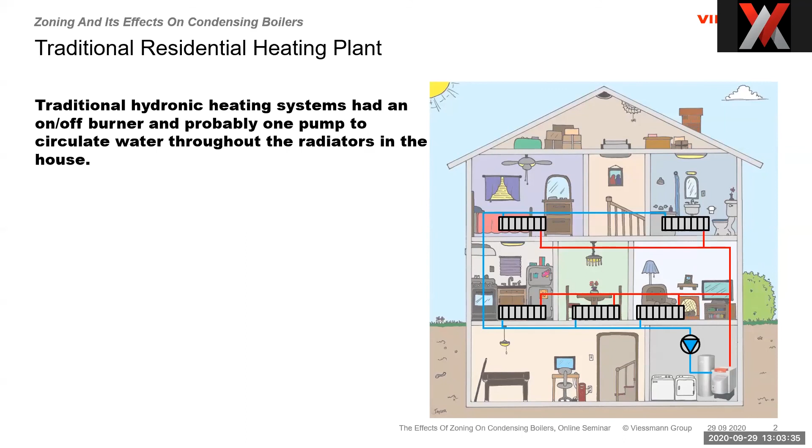Looking at boilers and how we put them in buildings, historically we had a building with a boiler, hooked up the piping, maybe one pump, and pumped water through the radiators. The boiler's control was set at the hottest temperature needed for the year. We had an aquastat on the boiler — set at 180 Fahrenheit for baseboard radiators, or 160 for cast iron — and that's what we had. We didn't really have a lot of control over what happened in the space. People in the house had to just live with it; when it was warm outside, the boiler was still making 180 degree water.

People tried shutting manual valves on the rads, and a lot of times they didn't work — you know that if you try to close a valve that hasn't been closed in 10 years or 20 years, it doesn't work very well. So this is how we started.

Even going back further, we didn't even put a pump in it. Gravity fed systems used really big pipes to reduce friction loss, letting the hot water rise to the top and the cold water fall to the bottom, and that's how we heated the building. Things have changed over the years — the first thing we did was add a thermostat, which was the device that allowed us to control when the boiler turned on and off from the space.

But it didn't control anything except the room it was in. The thermostat was located somewhere in the central part of the home where it was comfortable, where most people hung out. And when the thermostat was satisfied, it turned the boiler off, and the house cooled down.

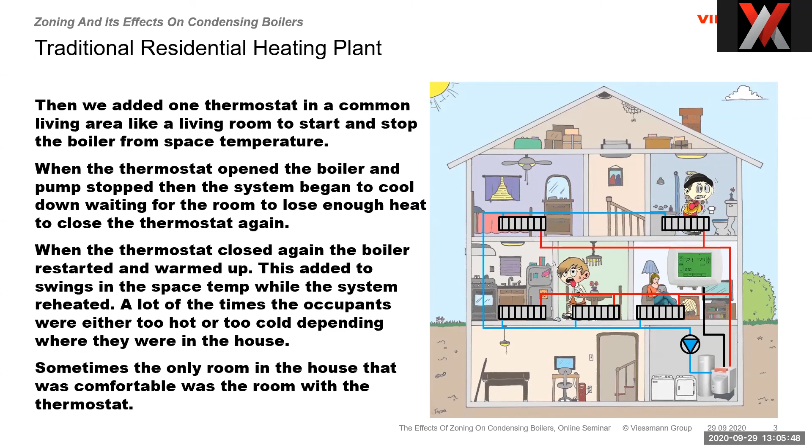So the only room in the house that was often comfortable was the room where the thermostat was in. Now fortunately, during these periods—and I grew up in some of those periods—everybody congregated in the living room anyways. We all sat around the same TV and watched the same shows, and there wasn't a whole lot else to do.

We added outdoor reset to try and make things more comfortable, and the second benefit of that is it also made it more efficient. The outdoor reset looked at the outdoor temperature and adjusted the water temperature based on that. It was a little better for matching heat loss and heat gain, but the thermostat was still in the living room.

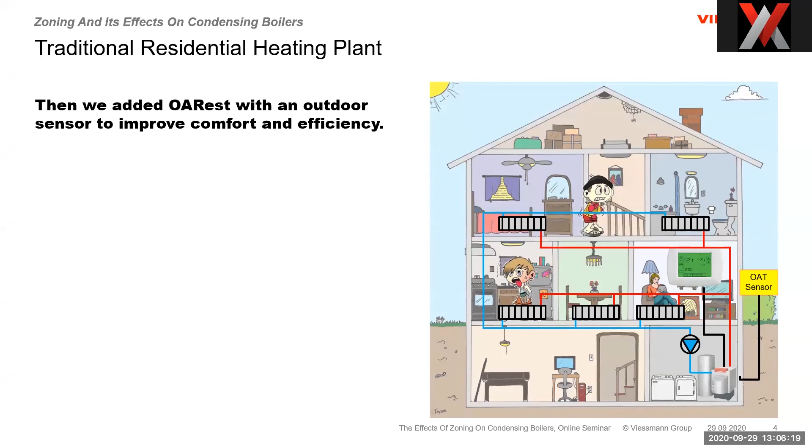That meant people in the kitchen were hot, and people upstairs or in the bathrooms were cold. The thermostat still cycled the boiler, but it was a little easier to deal with.

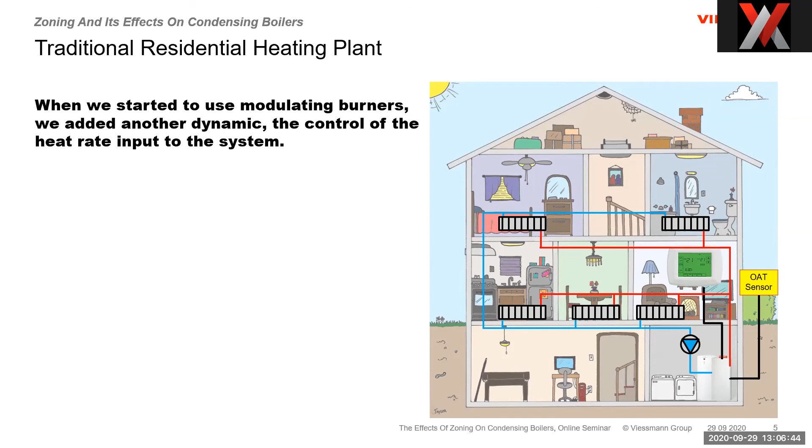When we started looking a little deeper at modulating burners, we began replacing the Vitola, an on-off burner, with a CU3A or a Viessmann or some other kind of modulating burner. Now it was a little better because we could adapt the heat input to the heat loss a bit more closely. But as things went along, we all saw what happened with the market.

Houses got bigger, they had more rooms, people's lifestyles changed. Instead of everybody gathering in the living room watching Howdy Doody or All in the Family or whatever show they watched together as a family, as a group, the internet started.

So people had TVs in multiple rooms. We had telephones, internet, game systems—all sorts of things that allowed us to split up into different parts of the building. And because the buildings were bigger and closed up a lot more, we found that thermostat in the living room just wasn't cutting it anymore.

So what did we do? We started to add zones. We started to add valves or pumps. The idea was to zone buildings into individual, compartmentalized spaces so we could control the heat within each space. And this is where we started to see some challenges with how we manage the boiler plant from the thermostat.

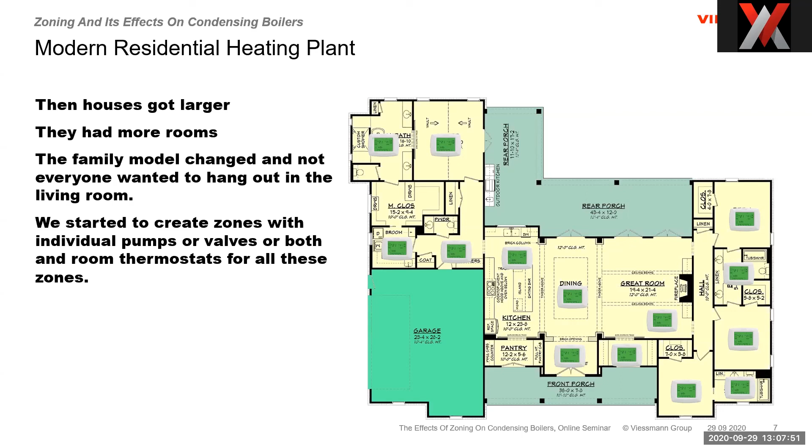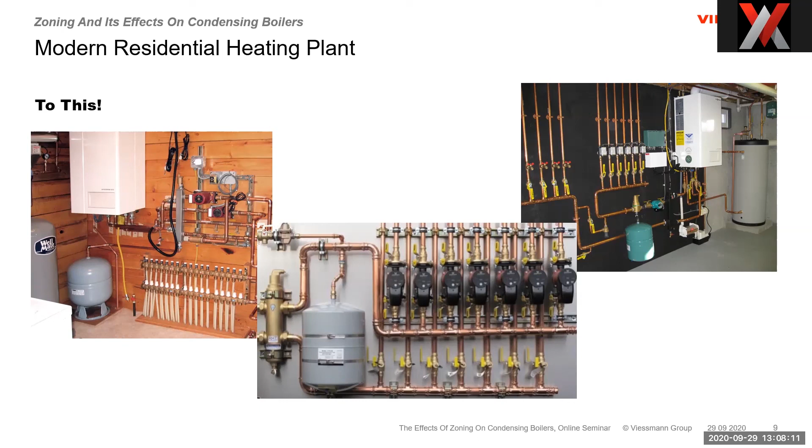So our boiler rooms went from this to this. We had zone valves, or pumps, multiples of them, and multiple thermostats. But the mindset was still, I want to turn my boiler off whenever the thermostat's open. Now we have a bunch of thermostats, so we have to look at how we do that, or why we even do that.

Look at this system here as an example. This is a low mass boiler, a Viessmann wall-hung boiler, which has very little water in it. We talk about mass—high mass and low mass—it's really about the amount of water in the bucket. The bucket in the Viessmann is about a gallon for 125,000 BTUs, versus a high mass boiler at 13 gallons. So that's the difference between low mass and high mass.

The low mass boilers also have a higher pressure drop, meaning the water going through them loses more pressure as it passes through the heat exchanger. That means we have to maintain flow through this boiler at a certain rate. If we don't maintain flow through the boiler at that rate, we'll either not be able to run the boiler, or it will get too hot and the delta T will go too high.

When we first started doing this, we started just replacing the cast iron boiler and throwing the low mass boiler on the wall, and we really didn't do anything to the system piping or the connection between the system piping. When we had zone valves closing, we had issues with flow through the boiler. We could have gone to variable speed pumps, but at that time they were expensive. So we went with a fixed speed pump and put a pressure bypass. That solved the flow issue through the boiler because we were always circulating the same water through the heat exchanger. But because of the low mass boiler, it also caused short cycling because there wasn't a whole lot of water to heat. So the boiler would short cycle, and again, when the thermostat opened and closed, the boiler would go off.

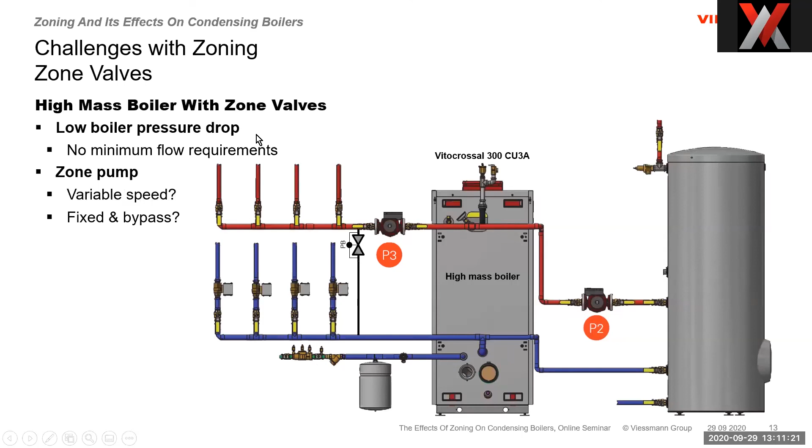So now we can get by without the primary secondary again. We still have some flow conditions where when the valves open and close the flow changes, but the high mass boiler has very low pressure drop. So it doesn't really care, and it doesn't need flow to run. So we've solved the flow issue. But we also have to deal with other things like the controls and the start-stop functions.

We also see systems that had pumps instead of valves. So now instead of 5 zone valves or 4 zone valves, we have 4 pumps. And downstream of those pumps could have also been valves. We'll get into that in a little bit. But the idea here is that whether it's zone valves or pumps, the same logic goes into play. We still have to deal with what happens when all of these pumps or all these valves are turning on and off by thermostats. What do we do with the boiler?

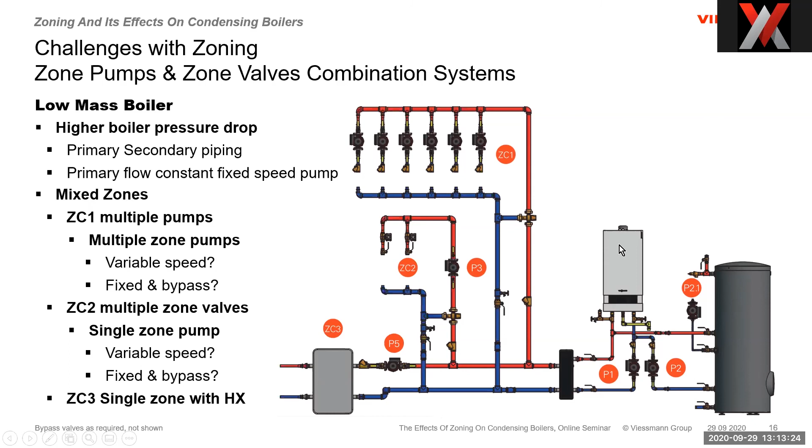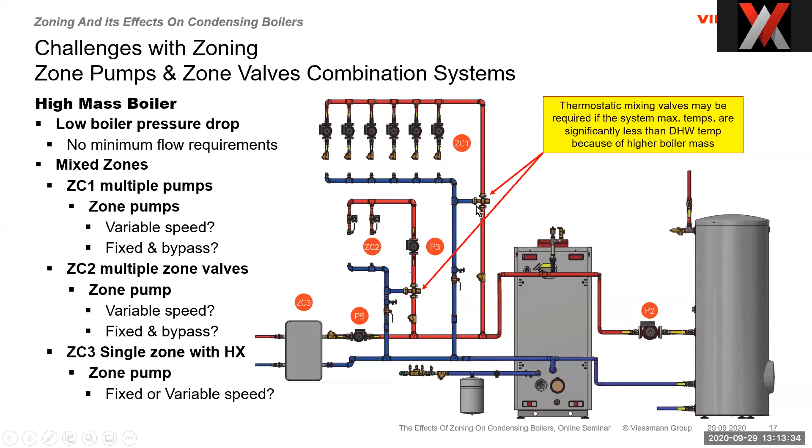So that means we have these 13 gallons of water sitting at 160 degrees. And if our system is only looking for 110 or 120 degree water, we're going to get 160 degree water when it switches back out of DHW. So these valves kind of limit that. The Vitodens, when we see low mass, it's not as big a deal because there's only a gallon or maybe 4 gallons of water in there. But when we have 13 or 18 gallons of water, it may be an issue. So we had the thermostatic valves just as a safety to protect this loop from the higher water temperature.

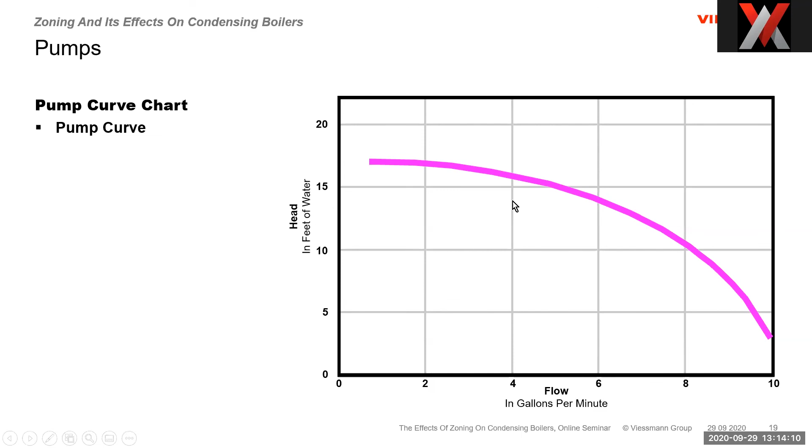But to move that water, we have a pump. So let's look at what we do when we have a pump. We have a pump curve. When you're selecting a pump, you're going to see a chart with flow across the bottom and head, or feet of water, across the side. Your pump will be able to move a certain amount of water against a certain amount of head, and we'll see a line on our chart, which is the pump curve. So the pump curve tells us that at this flow rate, we can move whatever head where they intersect.

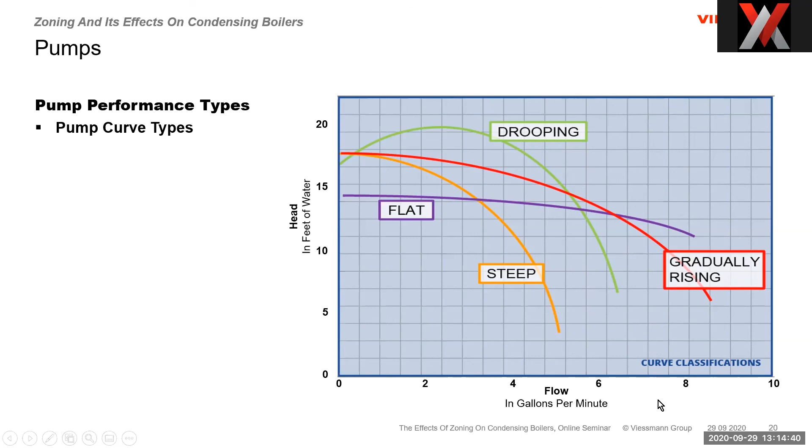But not all pump curves are the same. So picking the pump is also a matter of checking that the curve on the pump we're picking is in the right direction or the right parameters. Because when starting to close and open zones, we may have a pump curve that doesn't work. It might need a more flat curve, because as we change flow rates, it doesn't change the head a whole lot. So we need to select the pump based on our application for zoning and not zoning. We also see 3-speed pumps, which are now quite common.

So we have multiple speeds, and we select the speed of the pump based on whatever flow and head parameter we want. But the real reason to pick a different speed on a pump doesn't have a lot to do with flow as much as it has to do with temperature. Variable speed pumps have a nominal flow rate, and they'll be able to speed up or slow down, which just pushes them into a different curve. As we slow down, we have to look at its minimum speed, what head can it push, at its maximum speed, what head can it push, and figure out that the pump fits into that group of head and flow parameters.

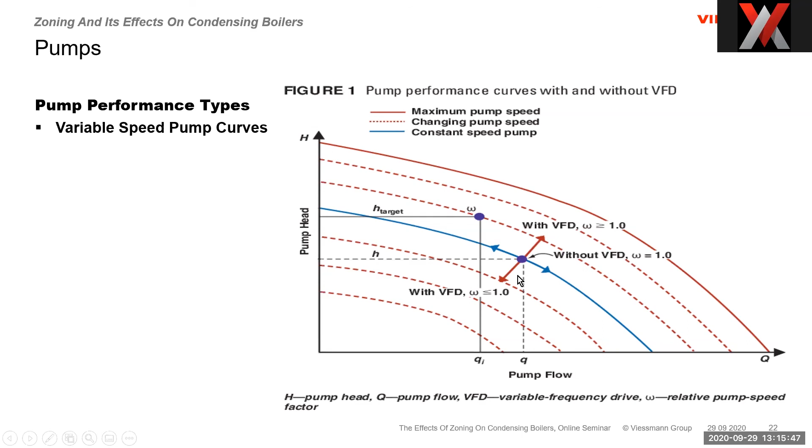Now this chart shows basically a single pump with a VFD, variable frequency drive, more of a commercial application. It doesn't really matter whether it's that or a pulse width modulation pump, a delta P pump, or a pump that uses 0 to 10 control. The theory is the same. We're going to speed up or slow down the pump based on what we need to move water. But at some point, every pump runs into the point where it can't pump water anymore against the head it's pushing against, what we call the deadhead point.

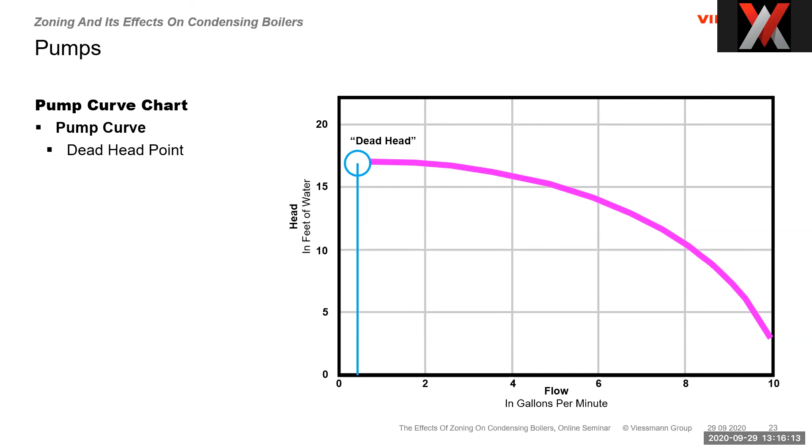And even with a variable speed pump, we look at variable speed pumps as the best option, we're gonna be able to put that pump in there and it's going to change speed. But at some point, we're not going to be able to pump water anymore, depending on the head it's pushing against. I want you to remember head, because we're going to talk about that a lot. Every pump has an optimal range, which we call the knee of the curve, and this is where you should be selecting the pump. You shouldn't be picking a pump way out here or way out there, you're picking something in the optimal range. Within that range, the manufacturer will say we can move water between here and here, but somewhere in that range is the best efficiency point, where the pump is most efficient. When looking at variable speed pumps, this is important to consider, because we're not always going to want the best efficiency point in the pump we pick.

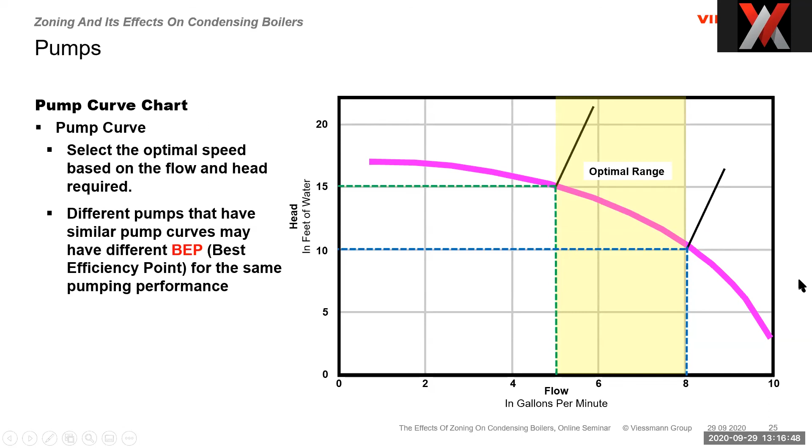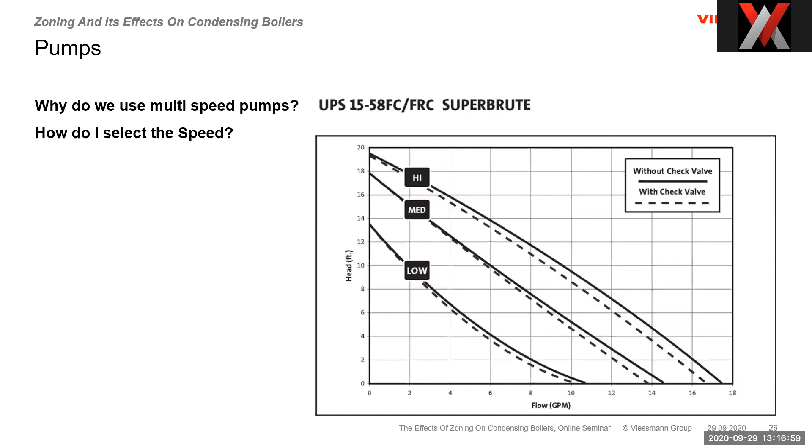Again, 3-speed pumps, why do we use them? I select the speed not really based on the flow I want, although that's an important part. It's more about delta T. If I want to change the delta T across a heating loop or a boiler, I can change the flow rate—that changes the delta T. If I'm going to run it at a lower flow rate, I also have to deal with the fact that my head pressure and head capacity are going to change. So you want to make sure you stay within the pump curve if you're picking the lower speed.

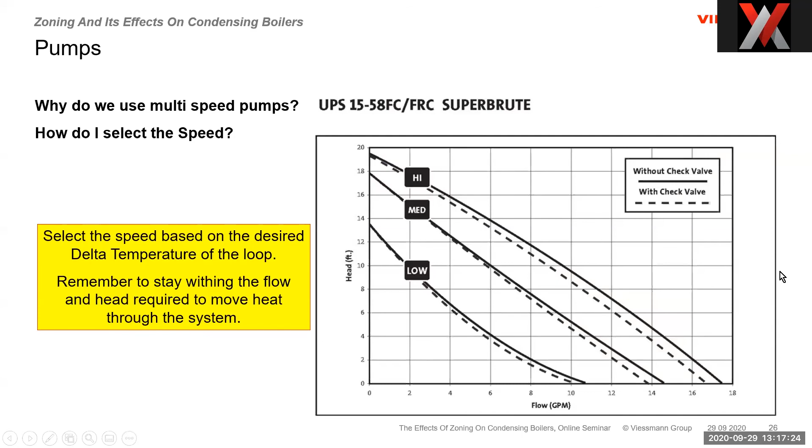So you don't always want the best efficiency point. You want to look at where that point works into your flow and head requirement throughout its entire modulation range.

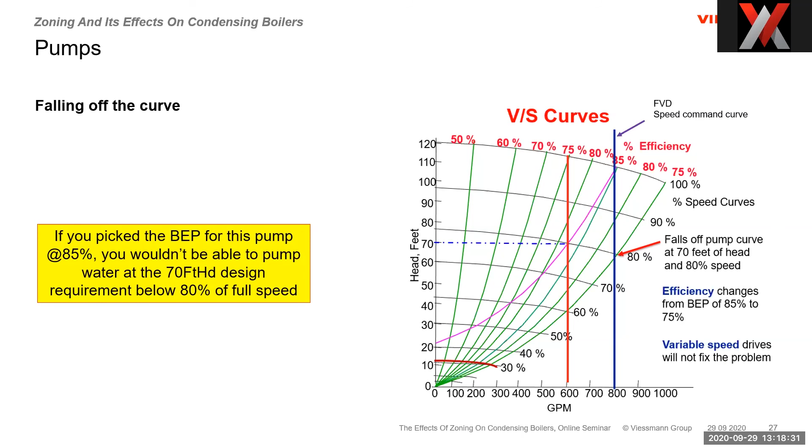But what do we need pumps for in the first place? We want to move BTUs—we want to move water from the boiler to the radiators, and when it's used up, bring it back. The amount of water we move is based on how much BTUs we want to move. There's a formula which helps us do that: heat transfer, fluid flow rate, a delta T across the system, and a constant. The constant is really about the specific heat of the liquid, BTUs per pound per degree Fahrenheit. It takes 1 BTU to raise 1 pound of water 1 degree Fahrenheit—that's how we get the factor for what we're doing here.

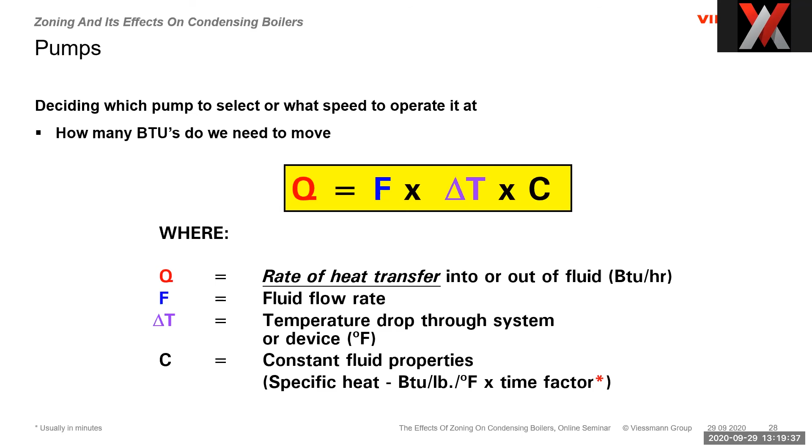And then there's the time factor, usually in minutes. Together they become a constant, which we don't have to remember anymore because we have the constant number—we just use it. There'll be a constant number for water, and a constant number for glycol, and you can pull that information from the internet to know how to size your pump. So we need to mix the formula around a little: flow rate equals energy in over delta T times the constant. That's how I'm going to determine it.

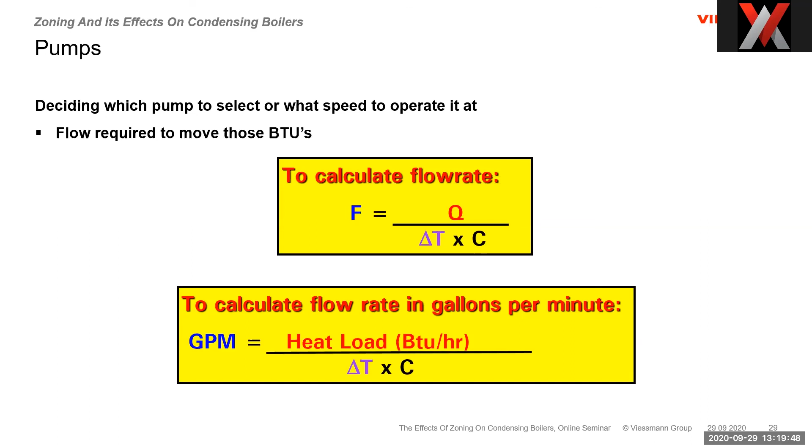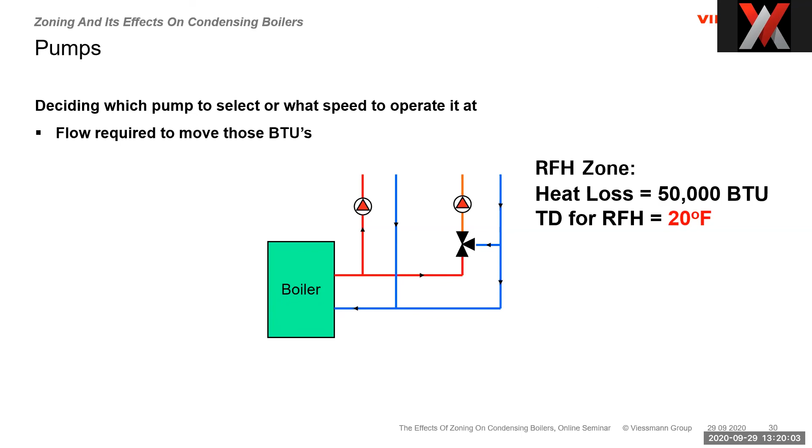Let's look at a system where we have a radiant floor zone with a heat loss of 50,000 BTUs. So the boiler has to move 50,000 BTUs from the boiler to the radiators and back, and we decided we wanted a 20 degree Fahrenheit delta T. Using the formula, GPM equals BTUs per hour over delta T times 500—this is where we get the time factor and the specific heat. For water, that constant is 500. So 500 times the 20 delta T gives us a denominator of 10,000, and we have 50,000 BTUs on top. 50,000 over 10,000 means to move 50,000 BTUs with a 20-degree delta T through this building, I need to move it at 5 GPM. This is how we figure the flow rate.

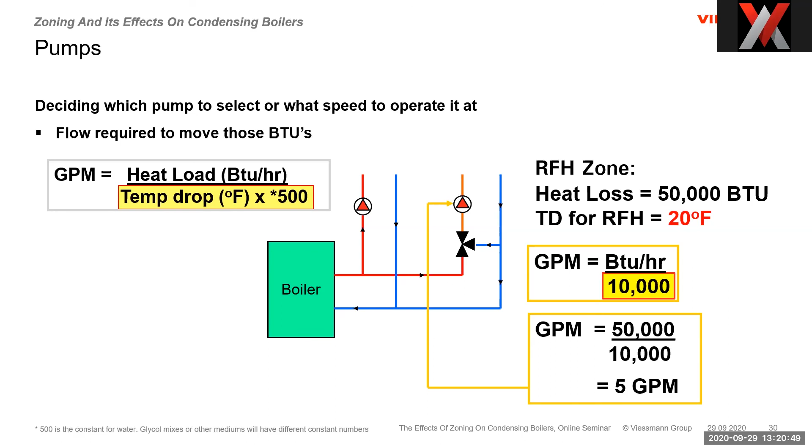But remember, that's only half of it—the other half is head. So we have to look at two things. First is the static head. Static head is basically the weight of water in a pipe, and it doesn't matter what the size of the pipe is—it just has to do with how tall the pipe is. It's like air pressure.

At sea level, we're at 14.7 PSI, and atmosphere in space is like nothing or very little. Water's the same way - the weight of water sitting in the pipe. In a 120 foot building, if we were doing this as a domestic water system, like a booster pump, we would have to have 52 PSI more pressure at the bottom than at the top. So if I want 50 PSI in my taps, I'd have to have over 100 PSI at the basement to get the water to the top because of that head.

Now, with a hydronic system, it's not quite that black and white, because whatever goes up comes down. So we have to overcome that head at some point, but once we have the water moving, the static head isn't a whole lot to deal with.

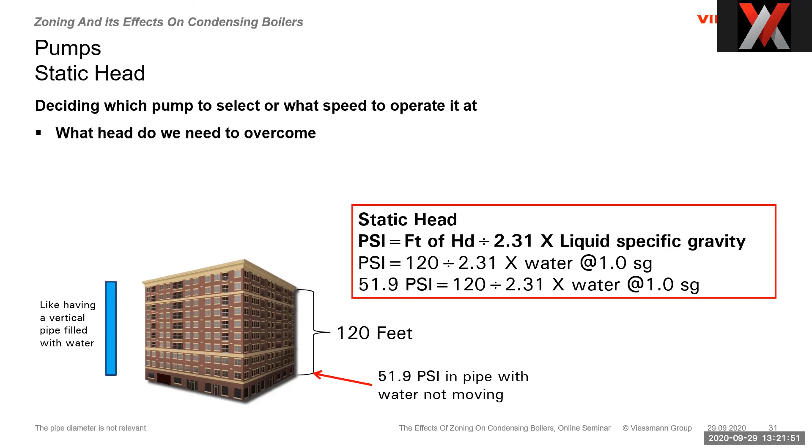What we do need to know, though, is in relationship to the pump and the piping, because we have a thing called static lift, which is the suction of the pump. Comparing that to a domestic system, like a rural well with a jet pump - people say they need to pump water, but when they look at the depth of the well, the static lift determines whether that pump can prime itself. So static lift is the suction pressure, and then we have the static height on top of that. Together they determine what the pump can push.

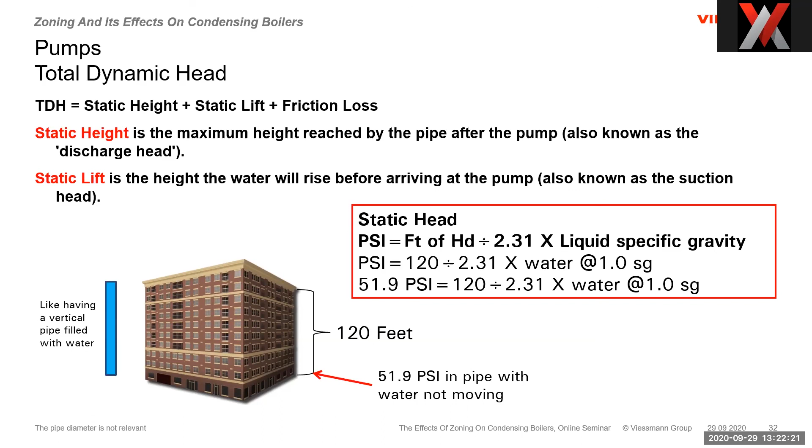We talked at the beginning about gravity systems, and they had great big monstrous sized pipes because they weren't pushing water - they were letting it naturally go up and come back down. That meant we had to have that bigger pipe so the friction loss was low. Same thing with our systems.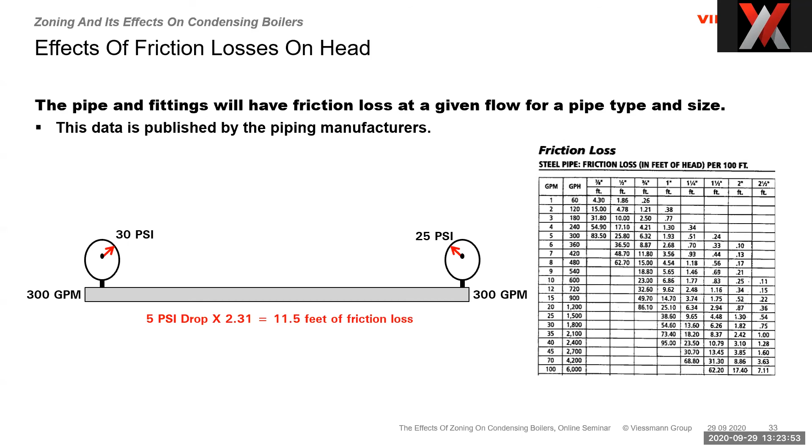One of the common areas where we see this as a problem is guys putting DHW tanks in because they account for the pressure drop in the boiler and the pressure drop in the tank, but they don't take into account the pressure drop in the piping between the boiler and the tank, and then they can't figure out why it won't make hot water. The boiler cycles on temperature and they can't get heat into the tank - it's because the pressure drop in the pipe is too high for the pump you picked.

Then we have control valves. A couple things about control valves: we need to know the flow and the pressure drop to size these, but we also need to know the size we need to move and the configuration. There's 2-way valves, 3-way valves, and 4-way valves. In a 2-way valve, it's really just open and close - it could be proportional, but it's still open and close. It either moves water or it doesn't. This is something we'll come back to as far as managing the pressure drop in the system.

3-way valves come in a mixing configuration - that's 2 in, 1 out, or diverting, which is 1 in, 2 out. They have different interior configurations and different purposes, so it's important that we know the application we're using it for.

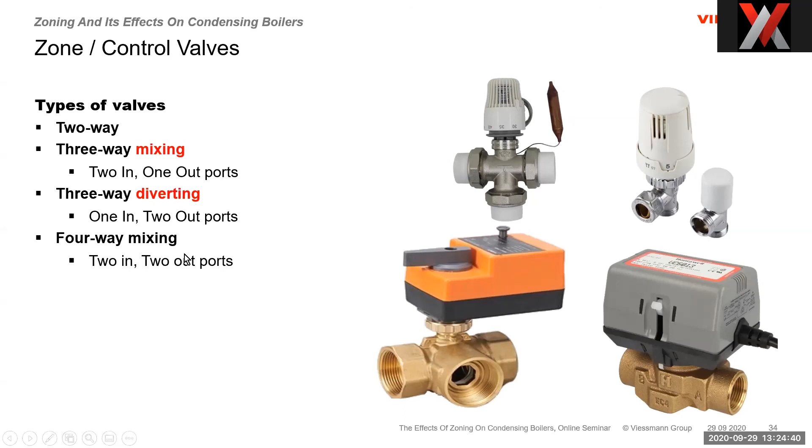And 4-way mixing valves - these can be in different configurations or different types of mechanisms inside. The most common one we see nowadays in the smaller sizes is a ball valve; they're inexpensive to make and easy to build. Once we get into larger valves, though, we see more globe valves, and globe valves are position important.

There's an in and an out to a globe valve, or it won't work against the back pressure. Butterfly valves really aren't used in control; they're used for isolation because they have really lousy proportional control. You can close a butterfly valve about 85 to 90% and it has almost no effect on flow, then 0 to 100% happens in the last 10% of travel. Same with gate valves. We don't see these used in proportional valves because it just doesn't make sense.

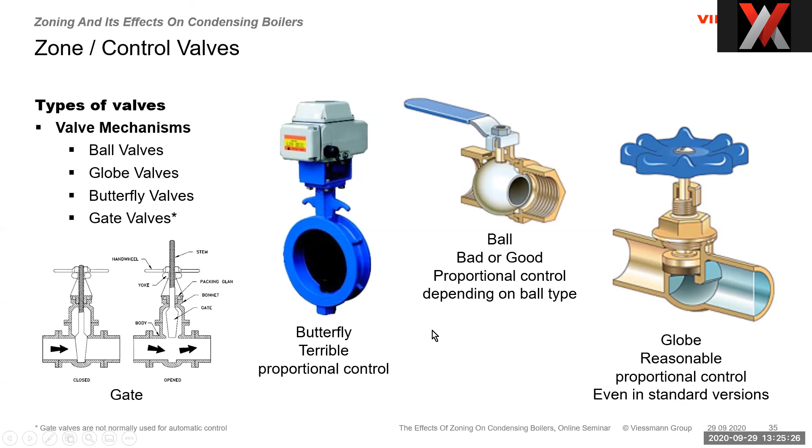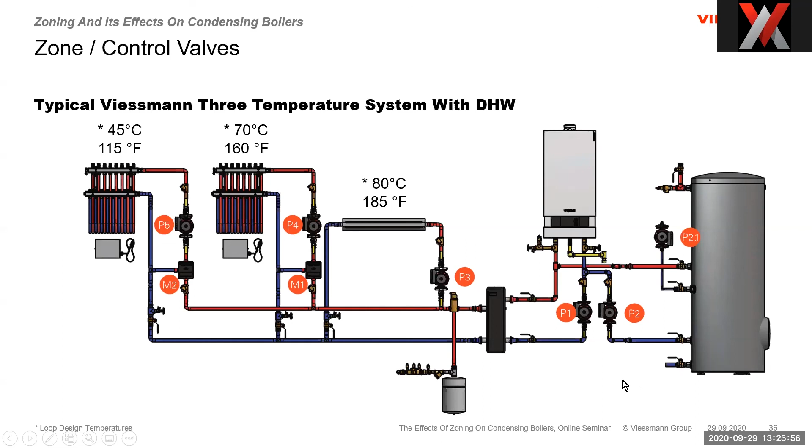When we were using cast iron boilers, we used four-way valves for this. We took the water from the boiler and the water coming back from the return, and mixed it together to lower the temperature going out here so it met the heating curve we wanted for that loop. But we wanted to keep the boiler itself hot, so we also took hot water from the boiler and mixed it with cold water from the system, elevating this water to protect it from condensation or thermal shock.

You can see, though, if I was going to put a condensing boiler in, what's going to happen to the boiler if I keep raising this temperature? I'm going to reduce its efficiency. So if you're replacing a cast iron boiler that has control valves, you also need to replace the control valves, and they should be three-way valves so the coldest water sees the boiler.

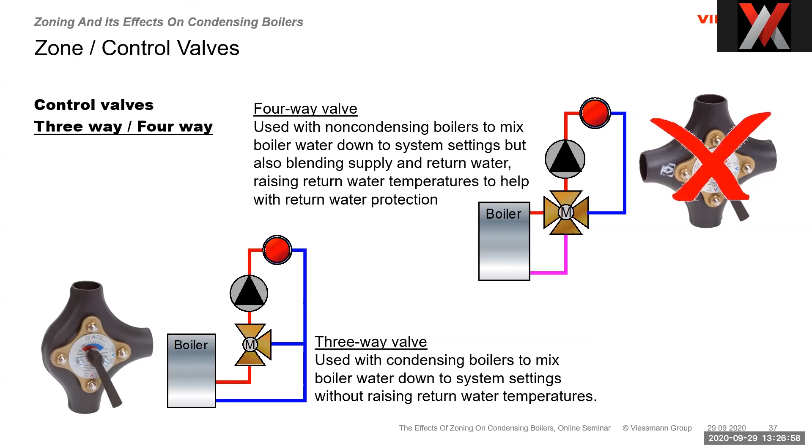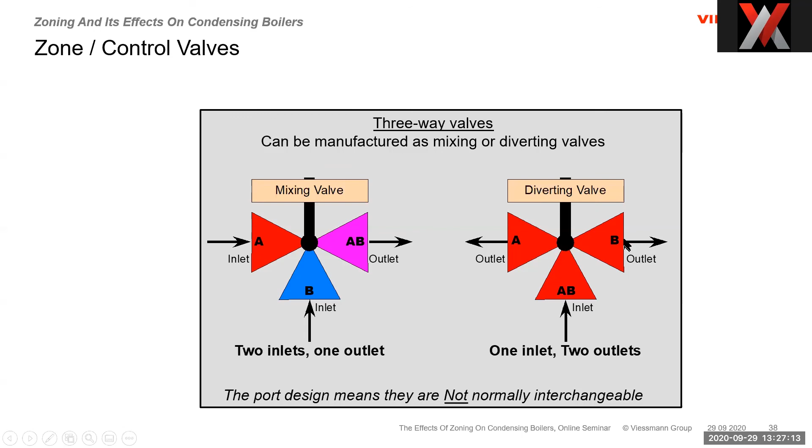So this is the difference between two types of mixing valves, four-way and three-way. For condensing applications, we want to use three-way, not four-way. But I said there are two different configurations, mixing and diverting. Let's look at what happens with the different types. You've got two inlets and one outlet on a mixing valve, and one inlet and two outlets on a diverting valve. They can both be used in a very similar application, but they're installed and configured differently.

So I have a mixing valve, and you see the pump pumping water through the fan coil here, either through the valve or back to the boiler. What happens here is my flow rate through the coil is always consistent, which means my delta T is always consistent. I might reduce the surface temperature of the coil by reducing the water temperature, but the delta T is always the same and the velocity is always the same. So as the valve changes temperature, it doesn't change the velocity, so I don't get debris settling in the bottom of the coil, which may cause a problem later.

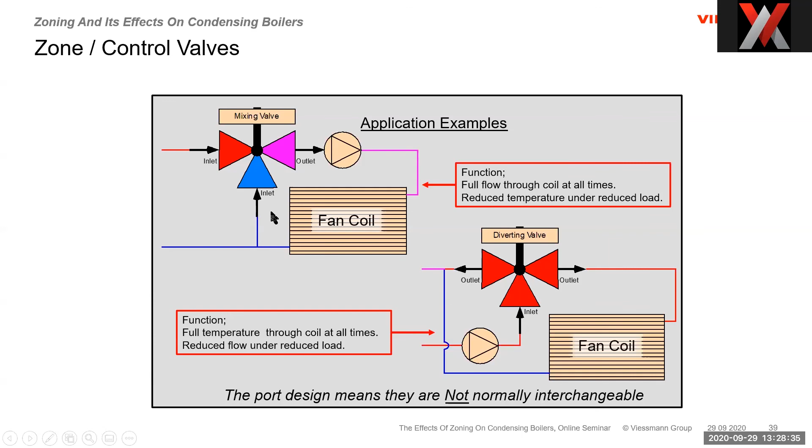But a diverting valve, used on the same fan coil, has the pump in a different place. You'll see a lot of commercial buildings built like this because the engineer wants to share this pump with multiple fan coils, which reduces design and installation costs. But what happens here is when I reduce this valve, I send some of the water back this way, which reduces the flow rate across the coil and changes the delta T on the coil. So we don't have a consistent surface temperature or a consistent delta T. Because the flow rate is low, we might settle debris in the bottom of the coil, and if this is an air makeup coil seeing cold outside air in winter, this could lead to a coil freezing. So we have two different ways of doing the same thing, but the configuration is different.

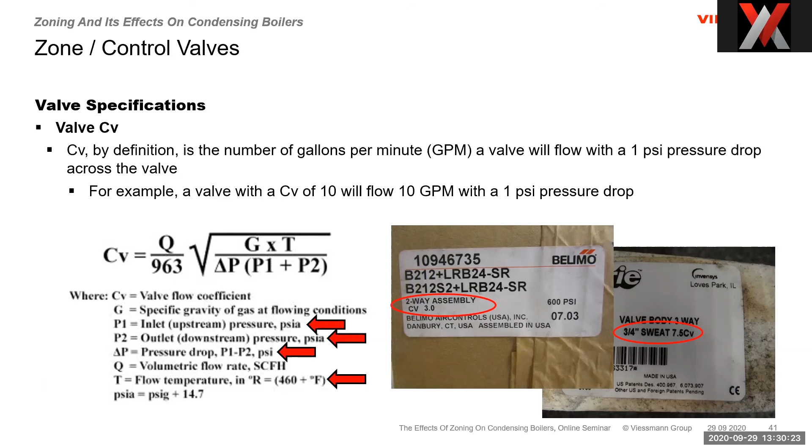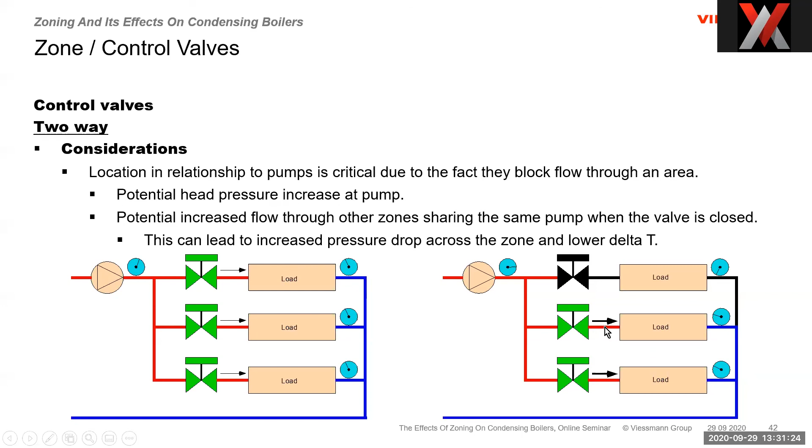So in some situations, closing this valve could actually stop heating these zones because I take it off the pump curve - the pressure drop would go up so much that I wouldn't be able to pump water through the zone. Again, with 15 GPM like this, when we close that valve, we have higher GPM here, meaning we potentially won't get the flow we want because the pressure drop goes up, the head friction loss goes up.

One of the ways we can solve that is maybe with a 3-way valve. But when we look at a 3-way valve, we have to consider that whatever pressure drop we calculated here has to be the same here. So depending on the system size, commercial building, we probably have to add a balancing valve here. But now you can see that we can bypass water and the pressure drop remains the same - the friction loss remains the same.

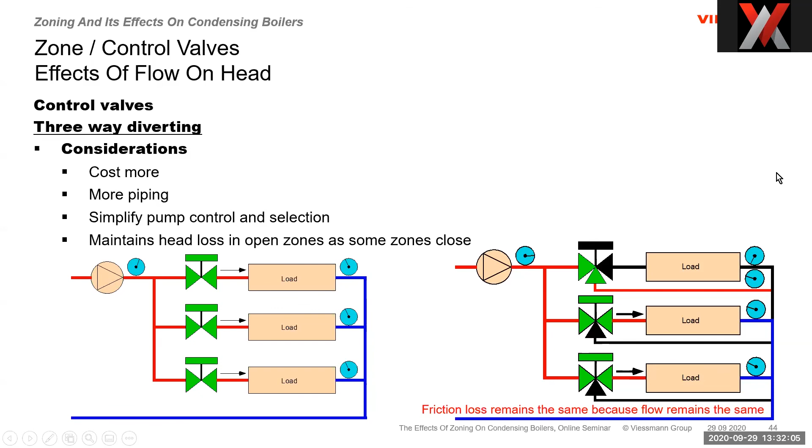The thing we have to deal with, though, with the diverting valve is remember that if it's a proportional valve, the delta T is going to change. So if this is not just open and closed, as soon as I change the water temperature, the delta T here - we have to consider that this is not going to be too cold at this end.

I've worked in some buildings - there's a building in Kitchener that used to be a department store many years ago, and they turned it into offices. When it was a department store, it was one big open space, so they didn't care - the radiator went from one end of the building to the other on that floor. But when they started breaking it up into offices, they ended up with a cold zone at the end, because the delta T was too high. They started making changes.

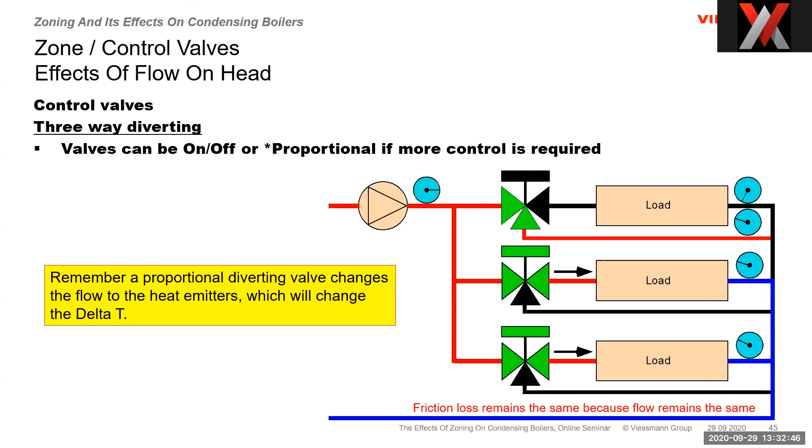So what if we change a variable speed pump? Now we have 15 GPM when they're all open. In this case here, we shut the valve here, and the pump knows that we've got a higher head loss, so it's going to reduce its speed. And now we have GPM here that's the same.

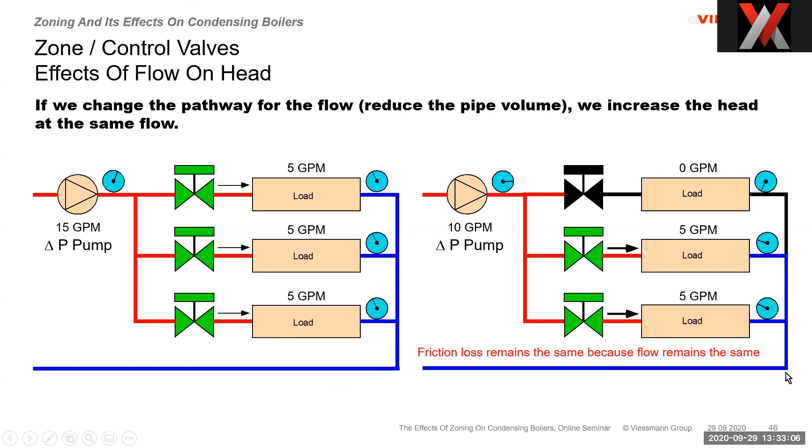This eliminates the issue with friction loss, but we start to see other issues. Here's an example: we have a zone like that with multiple radiators downstream of a mixing valve. Now we have 120 degrees coming from the boiler because the zones are asking for 120, so the valve's really just open all the way. The water's going through the rad, it's coming back, and most of the water is going back to the boiler. So we have this 20-degree delta T we asked for.

But now we say, well, we only need 100 degrees here, but the boiler's still making 120 because there's another loop or zone asking for 120. So we're going to mix some of that, taking the 120 and 80 and mixing it down to get 100 degrees. That means my return water temperature is lower, which means my delta T is higher. Now that's good for a condensing boiler—a higher delta T means a more efficient system. But there are flow examples of this as well.

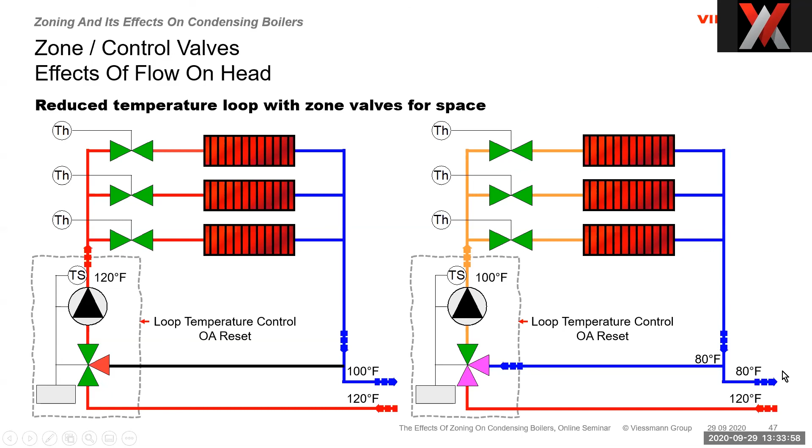Let's take a look at that from a flow perspective. Fixed speed pump—now we put a pressure bypass in here because it's an older system with a fixed speed pump. We close a valve, and we pass the same amount of water. So we're still sending, we've got 10 GPM coming in and 15 GPM here. We got 10 GPM coming in, 5 GPM bypassing, and 10 GPM coming out. So everything's balanced as far as flow goes.

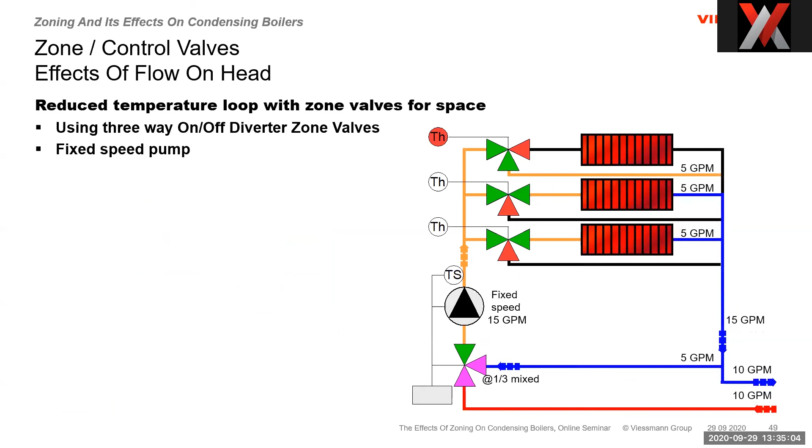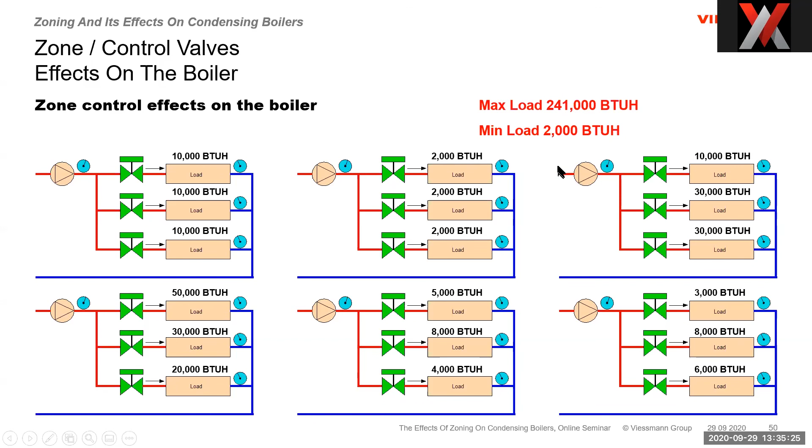But here's a building with a lot of zones. The biggest zone here is about 50,000 BTUs, and the smallest zone is one of these 2,000 BTU zones. So when the building is under full load, dead of winter, everybody's calling for heat, we need 240,000 BTUs. But there are times when we might only need 2,000 BTUs. If you were watching the webinar we did last week, we talked about delta T's and things like that.

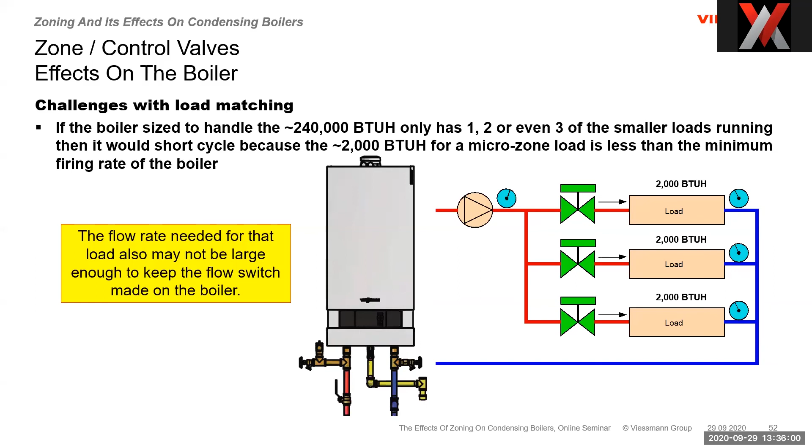At 240,000 BTUs, the flow rate through this boiler is whatever it's going to be for that. But we're only using the small zones—we call those micro zones. That may be a problem for this boiler because, especially with low mass boilers, it doesn't have enough flow to keep the flow switch made. So as soon as we start taking away zones, we have to look at the effect on the boiler as far as delta T's, flow rates, temperature set points, and whether we can actually keep the boiler running.

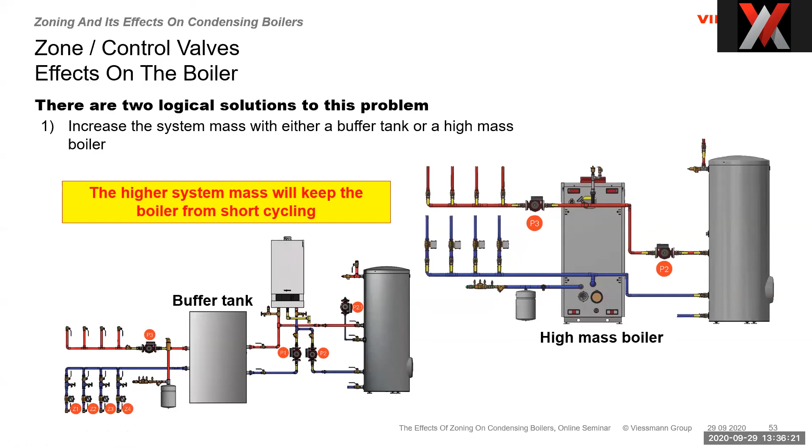We could solve some of that problem by putting in a high mass boiler or a buffer tank, because that mass will allow us to take the 2,000 BTUs off the buffer or the boiler's mass. That's one solution. Another solution might be this: now we have a microzone, and if you look in the back of our application guides for Vitodens 200, 222F, and CU3A, you'll see an application that looks like this.

Basically what we're doing is using the mass of water that's in the domestic hot water tank. We store water at 140 degrees for domestic hot water, heated by the coil inside the tank. When the tank is hot and this zone calls, we actually take heat out of it through the radiator and back to the return side. So what we have is a system that is heated by the potable water's energy.

This allows me to control this zone from a thermostat and not put that minimum temperature load on the boiler. So we use the mass of the water in the tank, and when the tank cools off, the sensor in the tank tells the boiler, hey, I need to make hot water, and the boiler kicks in and reheats the mass of the tank.

So we always have a hot water tank with hot water in it, but we're going to use some of the mass of that energy to do this radiator. We might need to put a three-way valve in here again, because if this zone only wants 110 degrees and we're storing water at 140 or 160, then we need to temper that.

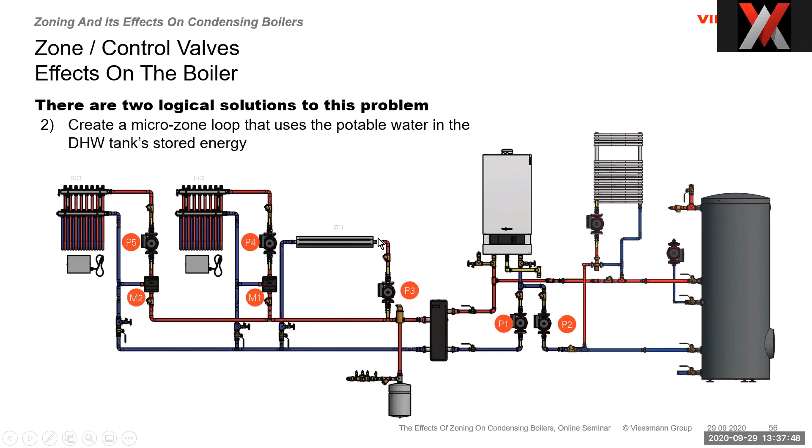So there you see it in the full application with the microzone on the primary side. This becomes a fixed set point, not a weather compensated loop. And these are all most likely weather compensated loops. So if I'm looking at variable speed pumping...

We often hear the term variable speed pumping used as the way we want to go. It's the more efficient way to do things. But we have to look at its effect on the boiler, especially from a low mass boiler. The boiler sees a change in flow as a change in load. Now, the most efficient I can make my boiler is to keep it at a very steady modulation rate.

So it adapts to the building load in a slow, careful process. It doesn't hunt. The PID logic inside the burner control and the temperature control in the boiler is designed to just do that. It's designed to find the sweet spot for the load. If the load changes, it's going to obviously change the modulation point. But under what we call a steady state condition, the modulation moves very little.

But as soon as I change the flow rate here in a low mass boiler, the boiler sees that as a change in load. So we have what we call the galloping boiler room. The pump speed goes up and down, the burner speed goes up and down slightly behind it, and we have this gallop of modulation, both the pumps and burners going up and down in speed.

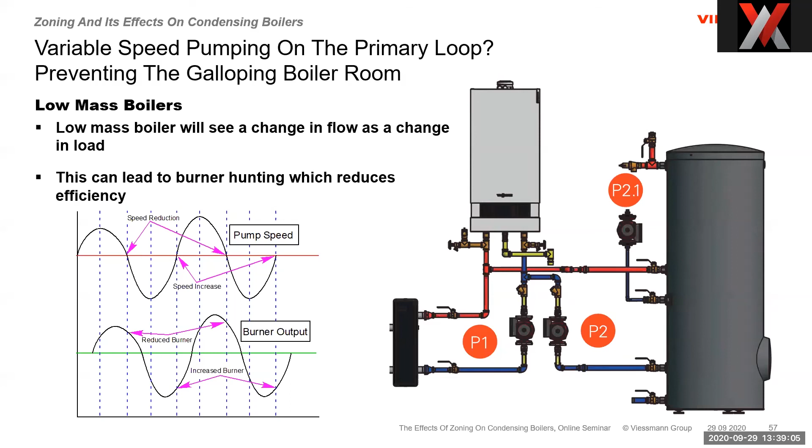So on the primary side, we generally want to keep a fixed speed loop. On the secondary side, we can do variable speed if we want. And with a primary-secondary separation, we can actually design the system for a slightly different delta T here than here. So if I want a 30-degree delta T on the primary side because I want colder water coming back to the boiler, and I want 40 or 20-degree delta T over here for a consistent delta T across the heat emitters, that's the way they're designed to be, and we can do that.

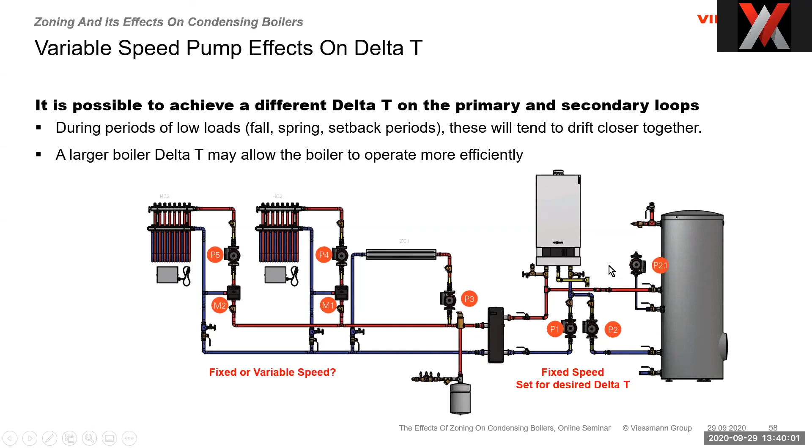At some point, as the loads go away, so these modulation valves close or the thermostat shuts this pump off, we don't have any energy being used here. The boiler's going to modulate down to its minimum firing rate. You're going to see the delta T shrink because there's no place for the heat to go, and the boiler will eventually shut off because it has no load. But under normal load conditions, we can keep that delta T a little bit larger, which makes our condensing boiler more efficient.

Well, then we go back to this drawing. And we see that we got pumps and we got valves and we got a snow melt system. And in our application guides, we show connections like this. So we have all of the end switches from the thermostat, or from the zone valves, connected to the boiler in parallel, so that if all the zones are closed, we turn off this pump and we actually turn off the boiler.

But what if we looked at it from this perspective? If we didn't connect these zone valves to the boiler and let the boiler run on its outdoor reset, the boiler maintains a consistent outdoor air reset temperature, and we don't have fluctuations in the water system. Remember the beginning slide, when the thermostat shut the boiler off, everything cooled down and then had to warm up again. If we don't let the boiler cycle by the valves, we can keep the primary loop very stable.

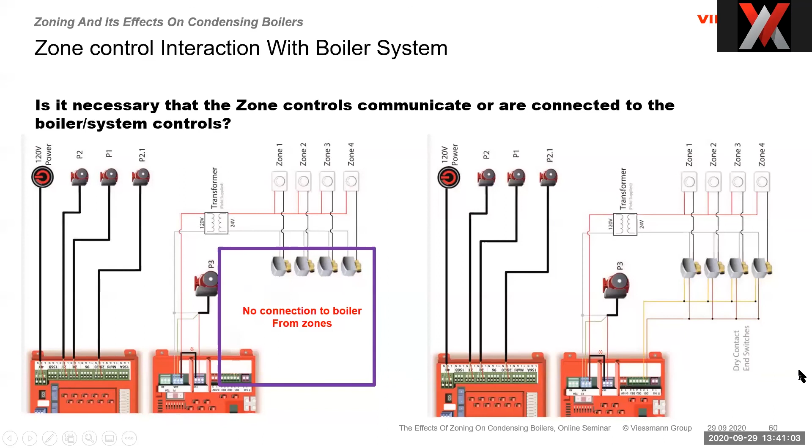We could do that with valves, or we could do it with a multi-zone pump controller, same interface. This works if all of the systems are the same temperature.

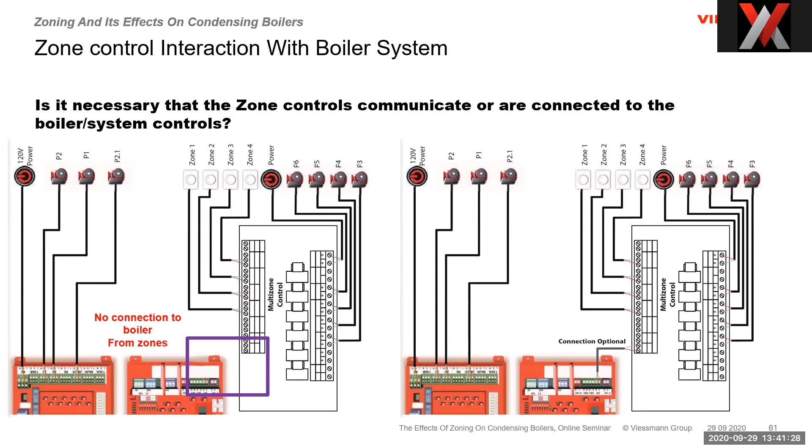Now, in the Vitodens 200, the 222F, or the CU3A boiler, the Vitotronic control has two ways to program it: either heating circuits or zone circuits. There are videos online that talk about the different setups, so I'm not going to spend a lot of time on that. I made a 3-part video on that a little while ago, so you can check that out.

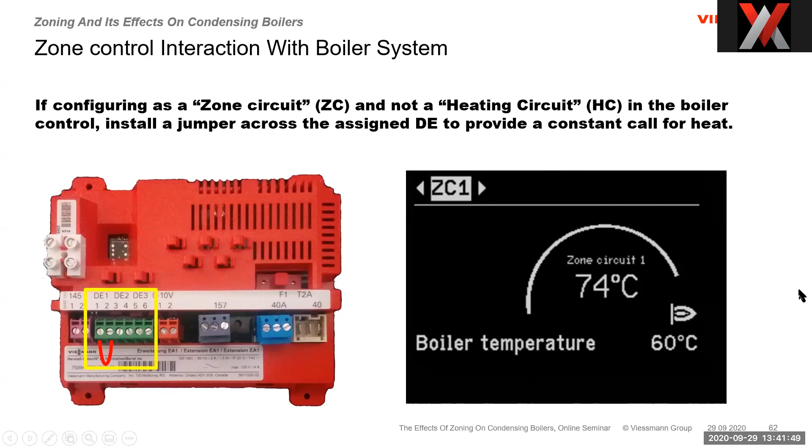But if you connect and program it as a zone circuit, it doesn't have a call for heat unless it has a contact close, so you might put a jumper in here. Normally you just program it as a heating circuit instead of a zone circuit. But if you don't want the mixing valves, then you only have one of those.

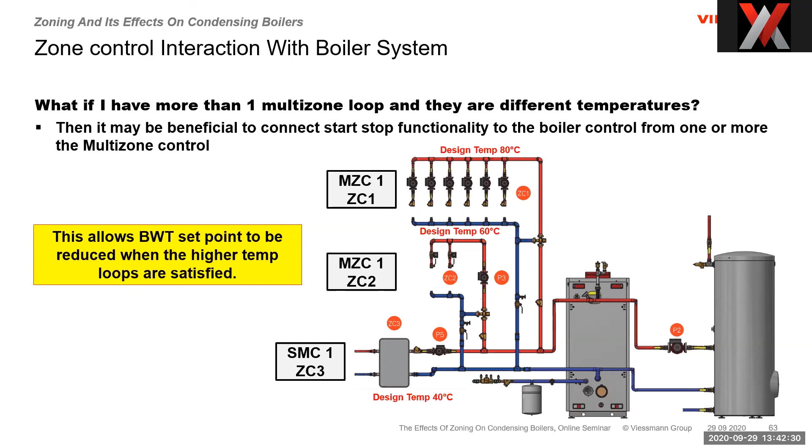So when we hook up the thermostat dry contacts from the multi-zone control to the boiler, when I have multiple temperatures, we get the trade-off that we can run the boiler at lower temperatures. So this makes sense.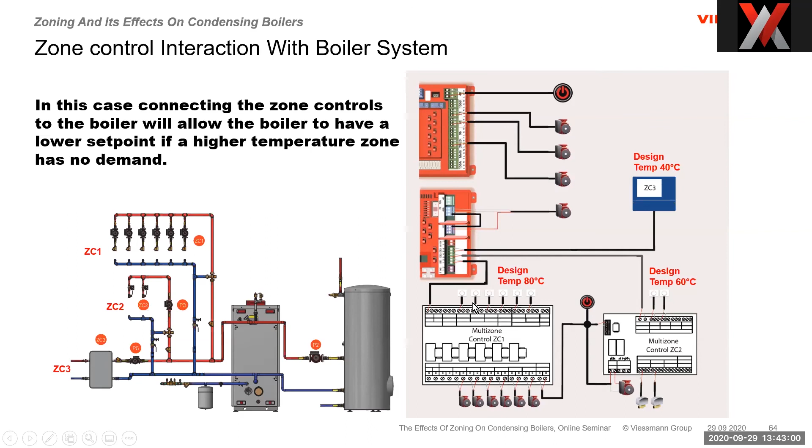If you have a multi-zone control with different temperatures, you connect them to individual points in the boiler controller, and they will cycle the boiler based on that set point or change the set point in the boiler. So as long as this contact's closed, the boiler is going to do 80 because these two are lower. The only other one is domestic, which becomes a priority. But if all your systems are the same temperature, it doesn't make a lot of sense to use those interactions between the boiler and the zones.

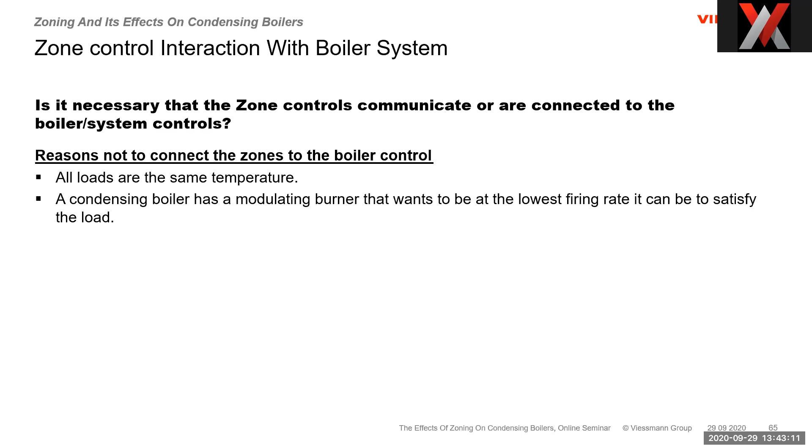So what are the reasons why we do not want to connect zones to the boiler? All the loads are the same temperature. A condensing boiler has a modulating burner that wants to be at the lowest firing rate that can satisfy the load. A condensing boiler is more efficient at lower firing rates because the relationship between flue gas temperature and return water temperature is closer.

And when the thermostat shuts the boiler off, every time it does that, we increase the number of start and stop cycles happening in the boiler over a heating season. Every time we start and stop a burner, we reduce its seasonal efficiency, and this is not conducive to making an efficient system.

So the most efficient boiler plant I could build would be one that was perfectly sized—it would start in September and turn off in May and just modulate all winter. But that's not typically going to happen. So we reduce the amount of short cycling if we don't connect the thermostat back to the boiler as well.

But we have to take some things into consideration. Sometimes a load is better with a thermostat input. Air handlers are a good example—they're not consistent loads. We turn the fan on, raise the temperature in the space a couple of degrees, then it turns off, and we do that over and over again. We don't run the fan 24 hours a day typically, at least for delivering heat into the space; we might run it as air moving at very low speed.

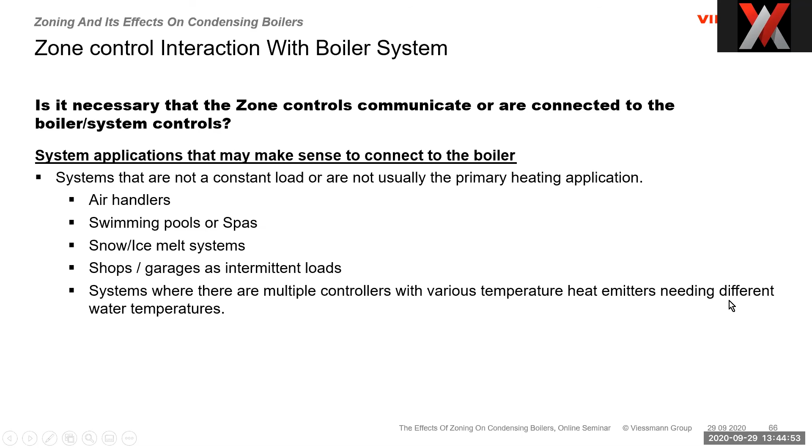Swimming pools, again, are a non-consistent load. Snowmelt systems, non-consistent load. You've got a shop—I don't know when the heat needs to be on when I'm in the shop, so we're going to turn it on an hour or two before I get there, and then we'll have some heat in the space. And systems with multiple controllers and various heat emitters—we talked about that temperature difference. So these are the things we have to think about.

But what I want you to look at is how the thermostat is like the ignition switch on your car.

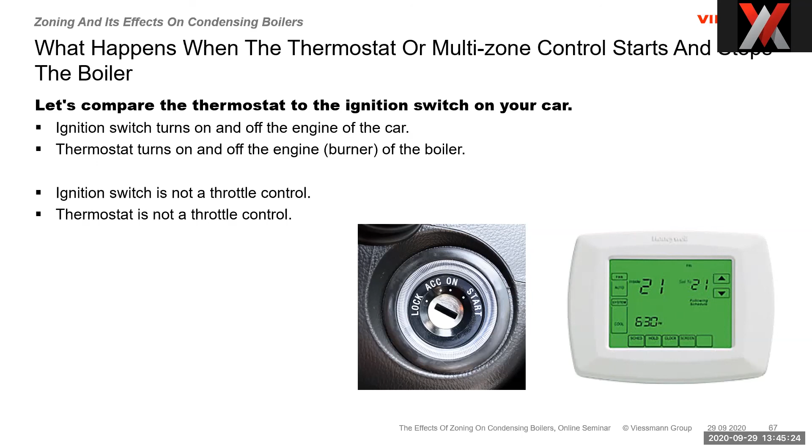When I drive my car, I use the ignition switch to turn the engine on and off. Same with the thermostat—it turns the burner on and off. They're not throttles or modulating controls, not controls designed to maintain a speed or temperature. They're designed to say I don't need you anymore, or I do need you.

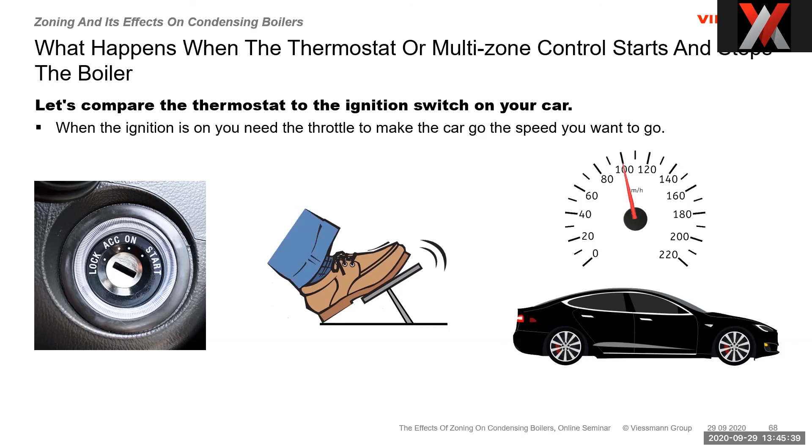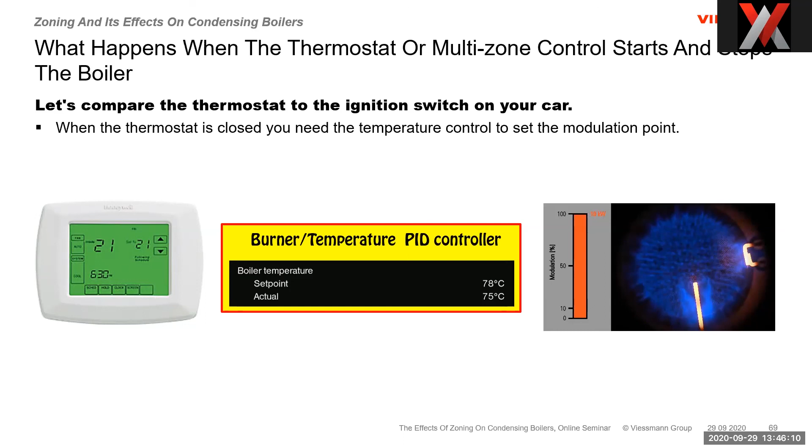If we drove a car like my thermostat runs the boiler—turning it off at speed, then back on—we'd lose speed and have to give it more gas to get back up to speed. It's the same with my boiler: when I turn the thermostat off and back on, the boiler starts already behind on temperature, so the modulation rate has to work harder, going to a higher firing output to deliver the same capacity. With a modulating burner, a condensing boiler is more efficient at low fire than high fire, so this becomes an efficiency issue for us.

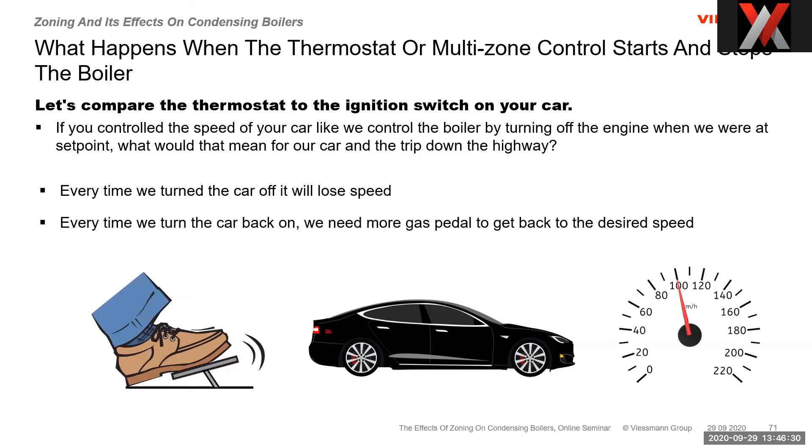If we don't connect the thermostat or multi-zone control to the boiler itself, because all the systems are the same temperature, we get a more efficient boiler plant. We have to get our customers to understand that when the thermostat opens, the boiler doesn't necessarily have to turn off.

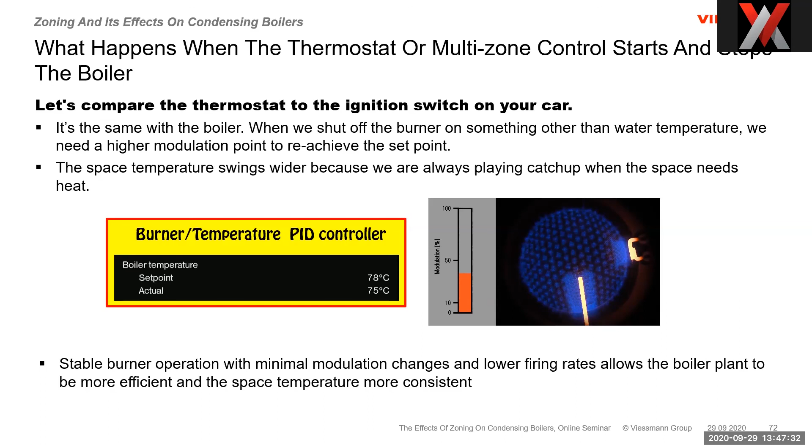This is 1950s technology. We added the thermostat so we could control an on-off boiler, and it helped at the time, but it didn't make anything more efficient. Now that we have condensing boilers, it certainly doesn't make it more efficient.

If we leave the thermostat out of it, letting it control zone valves or pumps on the secondary side, my space temperature is more consistent because I don't have that warm-up period before delivering temperature. Your thermostat already has a deadband—it opens and closes with a differential built in. If it opens while the system still has extra energy, it'll add a bit more heat to the room unless we stop the pump. But as it closes and the boiler starts, we're still going to lose temperature in the space because the water hasn't been heated to the right temperature yet—it's lost temperature in the system.

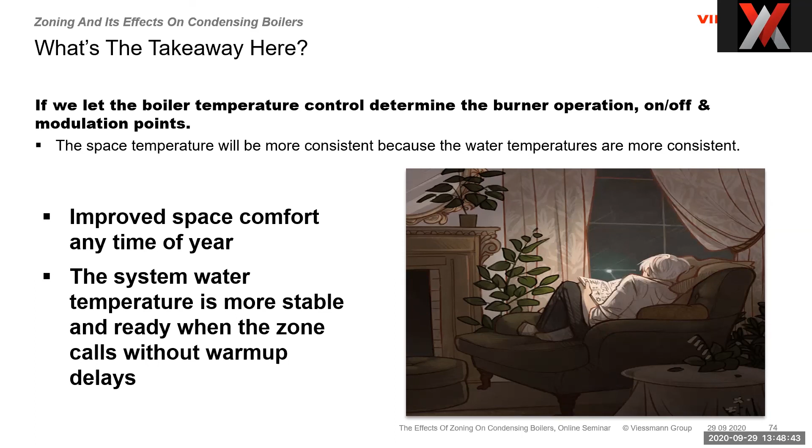If the boiler is independent of the zone control, it stays consistent at its outdoor reset temperature. When the pump starts or the zone valve opens, the water temperature is already right. The boiler sees the load and modulates up a little to catch the cooler water coming back and warm it up—but it isn't going to have to hit the gas or go full throttle.

So again, if we don't connect the thermostat to the boiler—if they're just on-off points in the space—the boiler will cycle less often and provide better seasonal efficiency if we don't put those two things together.

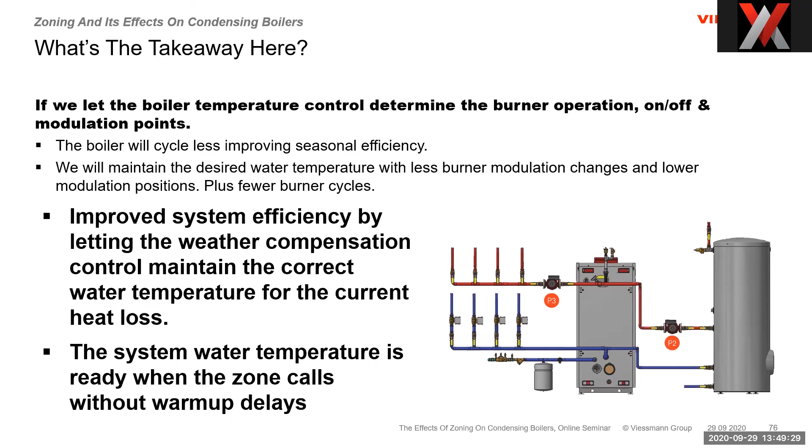So the takeaway here is we improve system efficiency by letting the weather compensation control maintain the correct water temperature in the primary or boiler loop, as long as the systems are the same temperature. I want to make sure I impress that if you've got multiple temperature systems, it may make sense to cycle the boiler just because you're changing the set point.

Don't worry about the boiler running wild, because if all the zones are closed, the boiler will catch the set point and eventually shut off. So if everybody's in setback overnight and the snow melt's not working, it's eventually going to catch the set point and shut off.

With our high mass boiler, they're well insulated - there's like 3 inches of insulation around it. With the low mass boiler, there's not a lot of water in there, so we're not dealing with a huge amount of heat loss to keep the primary loop or the boiler warm.

So your customer's concerned that the thermostat's going to make the boiler run 24 hours a day, overheat, and cause all sorts of issues. That's not necessarily the case, okay?

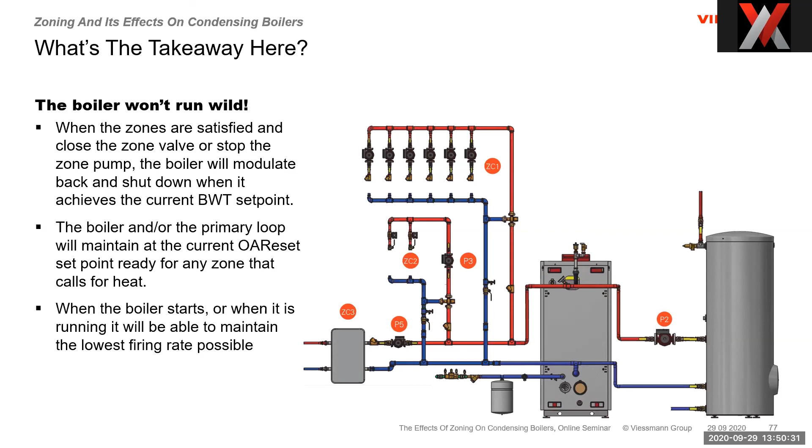The boiler will maintain the primary loop at the outdoor reset temperature, and if you set that up right, what happens is you add heat to the system based on heat loss. The colder it is outside, the faster the building loses heat. So the outdoor reset matches the heat loss to the input.

So let the boiler control the system. Let the zones control the building. That's the final takeaway here. That's really what it's all about.

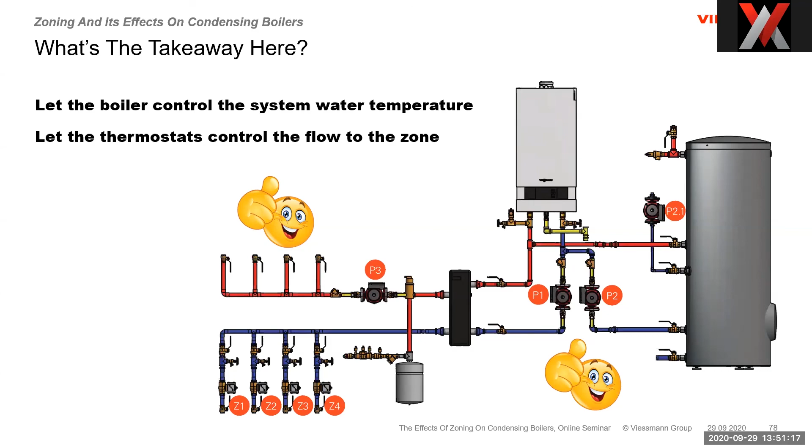Again, we see variations if the loops are different temperatures. In this case, we have one loop with multiple zones. If you have multiple loops that are all the same temperature, just different types of pumping or valves, or multiple areas of the building, let the boiler do its thing, let the building do its thing. The boiler's good at maintaining water temperature based on outdoor reset for efficiency. The zones and valves are good at getting water in and out of that room. Let them do their thing - they don't have to talk to each other necessarily.

And that's kind of what I have. I'm actually ahead today, Scott. Look at that. Do we have any questions? Oh, there we go. Sorry, my little pointer was on the wrong screen here, so it took me a while - maybe you were napping. Get it back here. It was in a different time zone there.

No, that's good, Mark. You did a nice job, man. You got a little bit of time here for some questions. It's interesting that you pointed this out.

I just had a conversation with a local contractor here that we deal with quite a bit, and this is in his own house actually. He put in a fairly sophisticated system, and the topic came up yesterday of where those zone valve end switches are going to go on the boiler control. And of course there are options now with the Vitodens platforms and the Vitocrossal 300 platforms where you can use the thermostat, the end switch contacts, or you can go exactly like you were saying here, let the boiler operate based on a keep up versus a catch up with a thermostat controlling that system.

So I said, well, why don't you try it both ways? So he had the end switches and stuff like that - he's going to give it a shot that way, and then once you're confident that system is operating, let's take those end switches off and try it the other way around and see how your system reacts. So we're going to have a bit of a live case study here as we move forward on the exact point you just talked about, Mark.